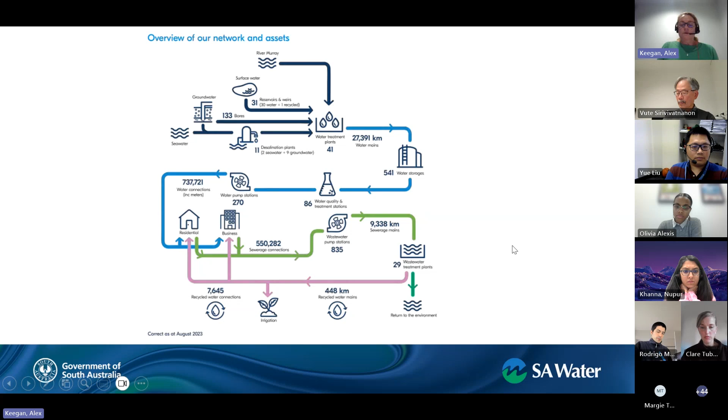One of the challenges we've had over the last few years is what to do with our alum sludge. So we call it water treatment residual. So this is the product that comes out of our drinking water treatment process. It can contain a whole range of organics and also some contaminants as well. At the moment, we're producing around 17,500 tonnes per annum.

We also have to classify our different water treatment residuals, and so this comes down to the different contaminants that are in there. So in some of our drinking water treatment processes for reservoirs in particular, to control algal contaminants and algal growth, we actually use copper sulfate, and this gets removed through the drinking water treatment process, but ends up in the sludge. So what that does is increase the level of contamination that we have in that sludge.

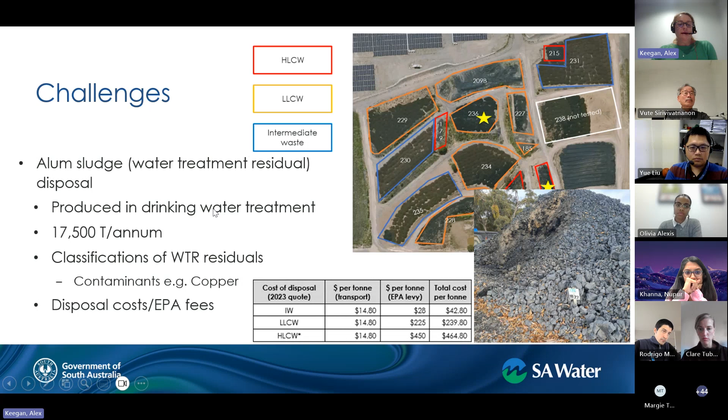So we wanted to come up with a better way of reusing this alum sludge and finding some value. What SA Water has done over the last few years is started going down the circular economy path and looking at some different options of what we could do. So beneficial reuse of what was deemed a waste product into actually making it a useful product. We do have a small amount of our alum sludge that goes for tree planting. So this works as an absorbent put into the bottom of the hole, and it's a water holding capability and helps the trees grow, and that's in our CBD area.

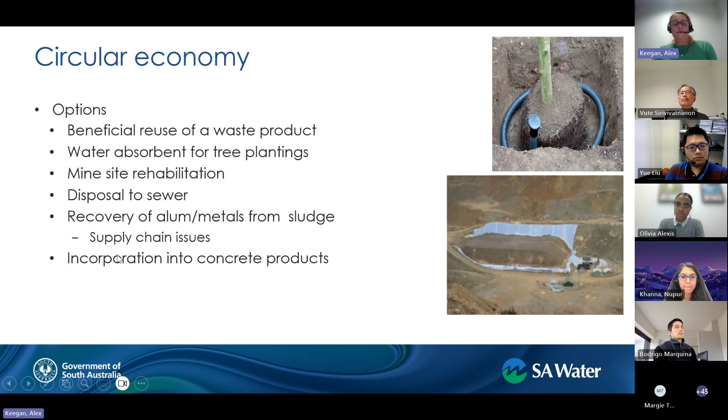Down the bottom here is the mine site rehabilitation that we've done. So this was a trial site looking at piling up the alum sludge, recovering any of the leachate that's coming off of that to make sure that that's not going and contaminating the land. Other options were around recovery of alum from sludge as one part of the recovery, or also metals as well, so copper. So we've found over the last couple of years that with supply chain issues, especially since COVID, it becomes more difficult to access some of these chemicals, and so having an alternative way of recovering them is beneficial. And the last one is what we're talking about today, so that's around incorporation into concrete products.

At the moment, it's looking like plastic pipes are potentially better, but throughout this process and these projects, it looks like there's the potential for fixing some of the pipe types by incorporating alum sludge, and Yu's going to talk you through that.

Oh, sorry, that didn't move on.

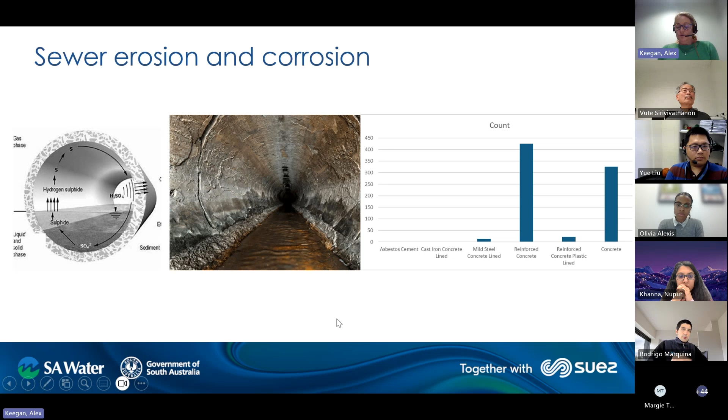I did get asked to just say a little bit about our engagement with Uni SA. So this isn't a brand new engagement piece. We've actually been working with Uni SA in different groups for as long as I've been with SA Water, so that's 24 years. So we started with a cooperative research centre for water quality and treatment when I came on, and the teams have been working together before that, working on different projects, highlighting different areas that needed investigation. We provide support and supervision and training for PhD students, and then we also have the university side feeding in expertise from the academics within the universities.

We also have in-house laboratories, so we've got 2 levels of laboratories, micro level and also chemistry type analysis, along with a commercial lab, so we can do a lot of this sort of thing in-house, but we also bring in expertise from the universities and Uni SA in particular for a lot of these things.

From those PhD students that we have supported through, there's actually been employment of a high number of PhD postdocs into the business and into other parts of the business, not just into the research arm. And so we've been collaborating for a long time and sharing our knowledge and expertise and issues that come through.

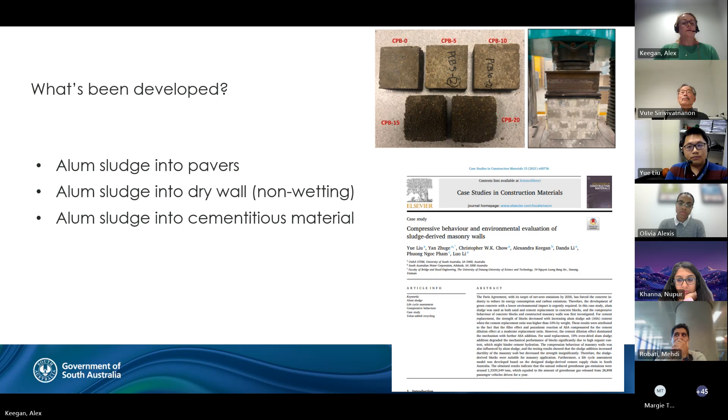So, oops, that didn't move forward. Oh, sorry, that's not moving forward.

So potential uses that we have that have come out of this are for the production of green pavers. So this is only small scale. We only have a limited amount of alum sludge that comes out, but we're looking at what the best options are for this anyway. At the moment, it's not been decided that we'd go down any of these paths in terms of implementation. There's sort of future work that needs to be done.

One thing could be cement pipe replacement. So could we develop a product that incorporates this alum sludge, and Yu will talk about the benefits that he's seen through incorporation of alum into the pipe, or potentially pipe relining.

So what we need to do is really understand in a larger scale application the corrosion rates and the durability. We have a materials engineer on site as well who would actually help support that through with the university. We also have a wastewater chamber at Bolivar. So we've been trying to upgrade that to do accelerated corrosion rates in that as well. Weiwei, one of the PhD students, has been using the chamber at ambient levels at the moment.

So any of these options would require feasibility assessment, design considerations, all those sorts of things. But really the aims around it are to reduce costs for disposal, which is great. Also to reduce the waste that's sent to landfill, which is great. But the third best bit of it is beneficial reuse of a product into a better product.

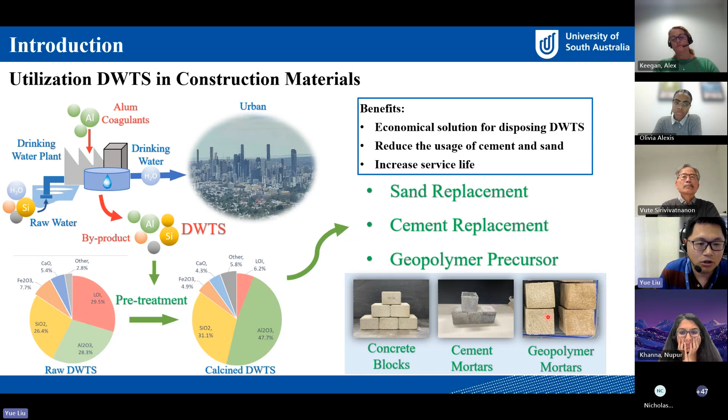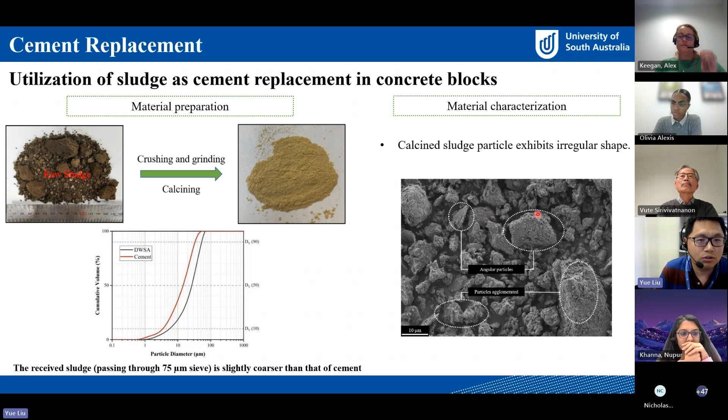The pozzolanic reactivity of sludge was measured by the Frattini test and the strength activity index test. Based on the results, sludge after calcination at 700 and 800 degrees shows satisfying pozzolanic reactivity, but 800 degrees is the optimum temperature to activate the pozzolanic reactivity of sludge ash.

Based on the chemical element mapping for the sludge and cement binder matrix, we found the sludge modifies the C-S-H gel by increasing the aluminum to silica ratio and decreasing the calcium to silica ratio. We also found the formation of aluminum-bearing phases is promoted.

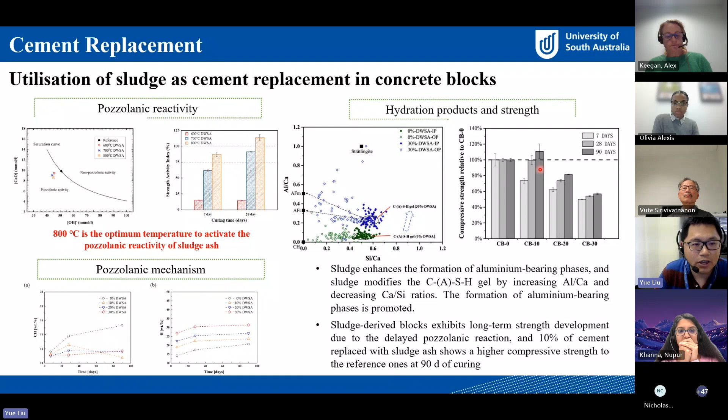In real practice, we put the sludge into concrete blocks, and found the sludge blocks show long-term strength development due to the delayed pozzolanic reaction, and 10% of cement replaced with sludge shows a higher compressive strength than the reference at 90 days of curing. The pozzolanic reaction is delayed because it normally happens when cement hydration produces enough calcium hydroxide.

To further analyze the reaction mechanism of sludge in cement-based composites, we did advanced nano-indentation and the selective dissolution method. This is the sample preparation procedure for the nano-indentation test. We put fractured pieces into epoxy and then ground and polished the epoxy to achieve a flat enough surface for the test.

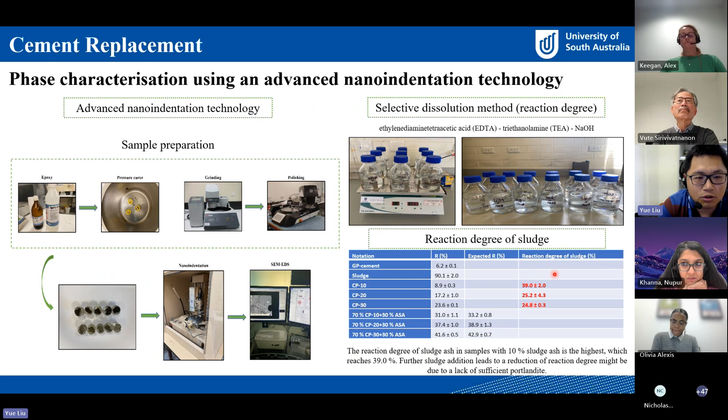For the selective dissolution method, we found that the reaction degree of sludge in samples with 10% sludge is the highest, reaching around 39%. But further sludge addition reduces the reaction degree, because increasing the sludge content reduces the cement content and also the produced calcium hydroxide.

This is the result for the nano-indentation test. We combined the traditional indentation test with EDS mapping, which links the mechanical response of each spot with its in-situ chemical analysis.

We found that the original C-S-H gel in pure cement paste is converted to aluminum-rich C-A-S-H gel, and the aluminum incorporation has no significant effect on the hardness and modulus of the gel. Also, the unreacted sludge shows much lower modulus and hardness than unreacted cement clinker. For sludge, the modulus is around 40 GPa, but for unreacted cement clinker, it's around 100 GPa.

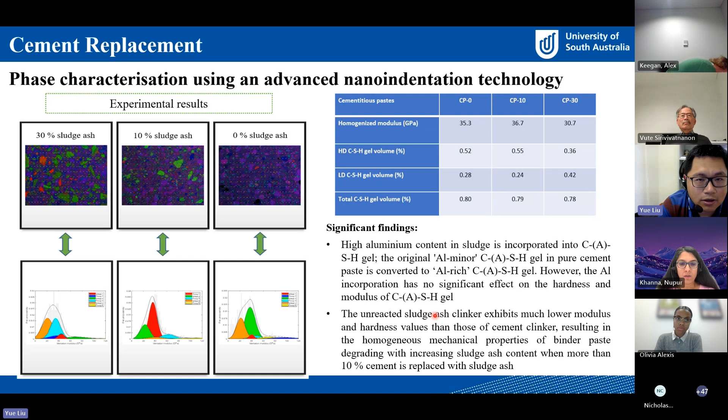As we confirmed the sludge can promote the formation of aluminum-bearing phases, and some of these phases may have excellent high temperature resistance, I tested the high temperature resistance of mortar containing sludge ash by assessing the mass loss, residual compressive strength, water absorption, and UPV. The superior heating resistance of mortar containing 10% and 20% sludge is confirmed.

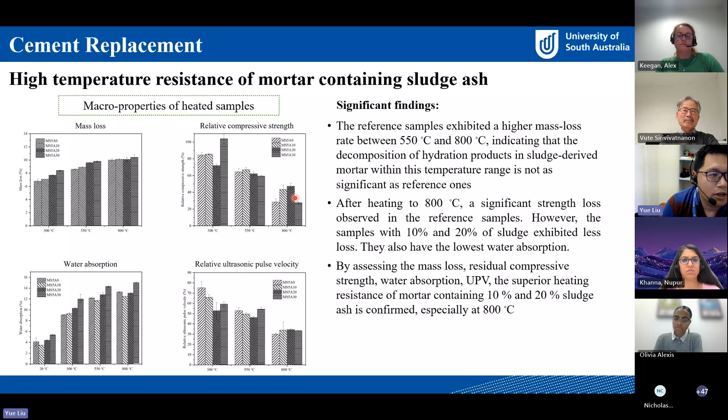For example, for the residual compressive strength, after heating to 800 degrees, a significant strength loss can be found in the reference sample. The strength reduced to around 28%, but the samples with 10% and 20% sludge retained 43% and 47% of their original strength respectively.

After the chemical and microstructure analysis, we found the improved high temperature resistance comes mainly from two aspects. The first is the formation of aluminum-bearing phases with high temperature resistance, like mullite. Also, the pozzolanic reaction of sludge consumed some calcium hydroxide.

Calcium hydroxide decomposes after heating to between 400 and 500 degrees, producing calcium oxide. But that calcium oxide can rehydrate during the cooling process, with a 44% volume expansion, and that expansion damages the concrete significantly. If we consume more calcium hydroxide, we can mitigate such damage.

This is the SEM observation for samples after exposure to different temperatures. The reference samples after exposure to 800 degrees show a dark color with porous microstructure and microcracks progressing with increasing temperature, but for the sludge one, the binder matrix still retained its properties. The color doesn't change too much.

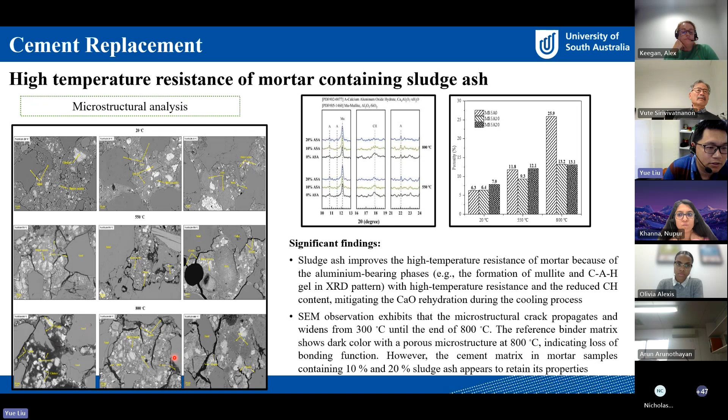And finally, there is a new type of cement we call LC3 cement. It contains 50% OPC, 30% metakaolin, 15% limestone and another 5% gypsum. Metakaolin contains around 40% alumina, which is very similar to our sludge. So I'm thinking about whether we can use sludge as an alternative for metakaolin to produce LC3 cement. That's why I conducted a study on the synergy effect of alum sludge and limestone on mortar.

Some interesting findings: when we added both limestone and sludge, it shows a positive effect on packing density. That's because the inclusion of limestone and sludge with different particle size distributions widens the spread of binder particle size, resulting in a greater packing density. For workability, because sludge has a very porous structure and absorbs a lot of water, it will definitely decrease the workability of concrete. But limestone addition actually slightly increased the workability.

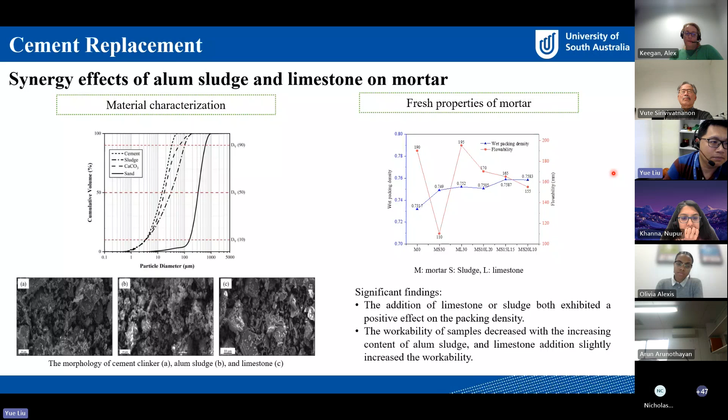For strength, combined limestone and sludge can contribute to strength development. This can be explained by the chemical reaction of limestone in the ternary binder system along with the pozzolanic reaction of sludge, extending the contribution to compressive strength development. For the porosity analysis, the combination of sludge and limestone shows a lower overall porosity than the reference pure OPC samples. And compared with the OPC samples, the combination of limestone and sludge actually refined the capillary pores.

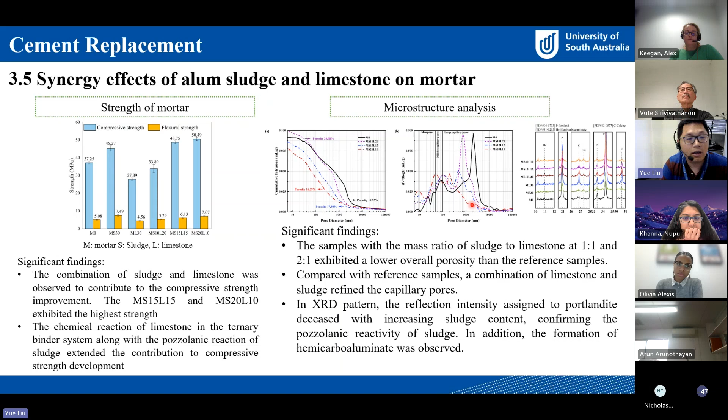And probably that's all I want to discuss today. If you want any further information, you can contact Professor Yan Zhuge. She's supposed to be here today, but she's traveling, so I present on behalf of her.